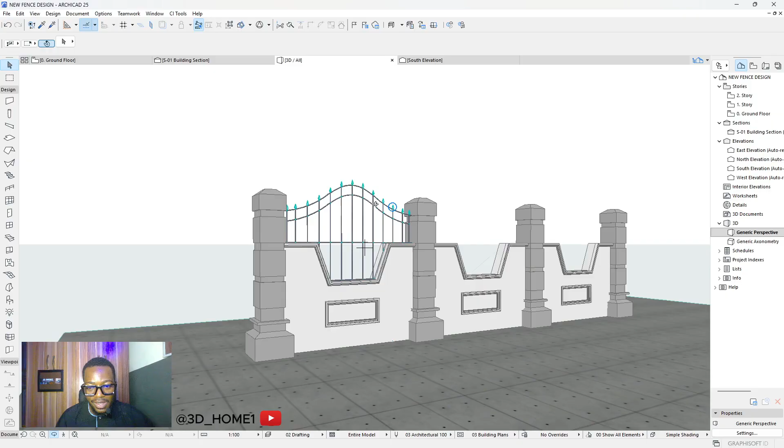Alright, let's get back to it. The first thing we'll be working on is the fence grill. You can see we have rough work already, okay? I did this for us to have an idea of what we're working on, so this is what we're going to model with more details. We are going to remove this, but just for you to have an idea of what we're about to do, we'll take this off and model something fresh.

So now, if you have a fence like this, or any design that you have and you want to model the grill, what you need to do is take the measurement of that thing. Because if you were to give a welder to fabricate this particular grill, he has to come and measure this. So for you to design it, you also have to measure it. Let's do the measurement together now.

So we'll be working with front elevation, which is the south. This is the south elevation. Let me take away this. This is the south elevation. So we need to take this measurement now.

The tool we're using for this is line. Under document, this is line tool, so click on line tool. Make sure it's under chained. Click on chain. Now I want us to pick the height from here. I want it to start from here.

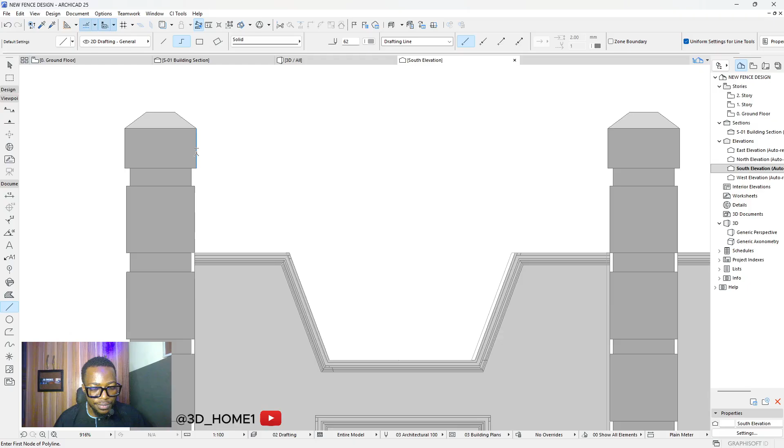Let's start from here, because these two lines are not aligned, so we'll start from here. We'll pick here to this point, and then take it all the way to this side. Once you get here, don't click on this line, just press shift and pick the same point. Now bring it down, come all the way to this point, click here, and take it down to this point.

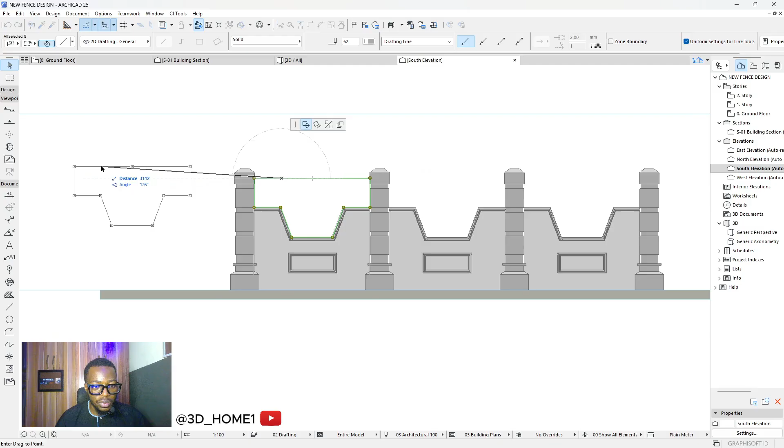What we are doing now is taking the measurement, we want to take the shape of that place. So now I click escape and click on this line. Let's take it outside to be outside. So we have the shape of this opening now. What we need to do now is like a form work, so everything we're going to model is going to be within and some touch ups. Once we're done here, we'll just take it inside and fix it for all these openings.

Alright, so after you've gotten the shape, the next thing is to go ahead with the design. Let's take off this one, but before then, suspend this group so that all the lines—remember we used chained line, that's why everything, without you suspending the group, is going to be chained. So for you to be able to click a single line, make sure you click on chain, make sure you click on suspend group.

Now you can click on single line. So let's do away with this line and this line, and then pick a fresh line. This time we're not going to pick chain, we'll pick single line, and then draw it all the way to this point. Okay, so now let's do the design.

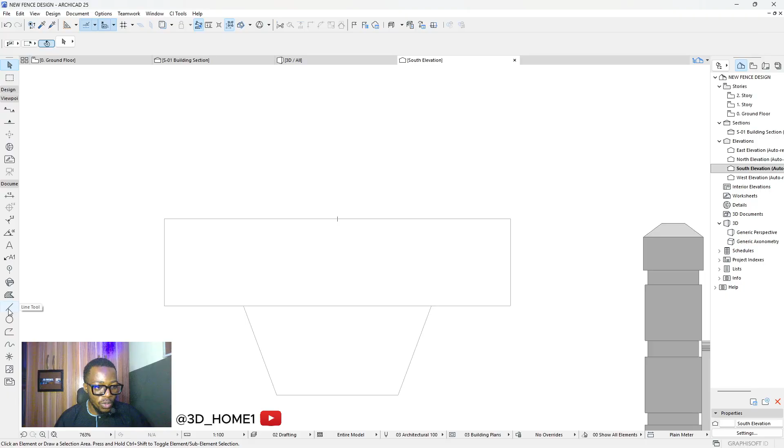You notice something like an arc on the other one, so let's do it now. We are going to pick another line from here. Now we'll determine the height that I want it to be. This is 430. Let's go with 450. It's still not bad, okay.

And now there's another thing we'll be using to get some points. After you've drawn the line, let's pick this hotspot tool. Click on hotspot tool, it's just for us to tick some lines, some spots—mark some spot. We have the spot now. Press escape. Now just select everything, shift and remove this one and this one, leaving only this one.

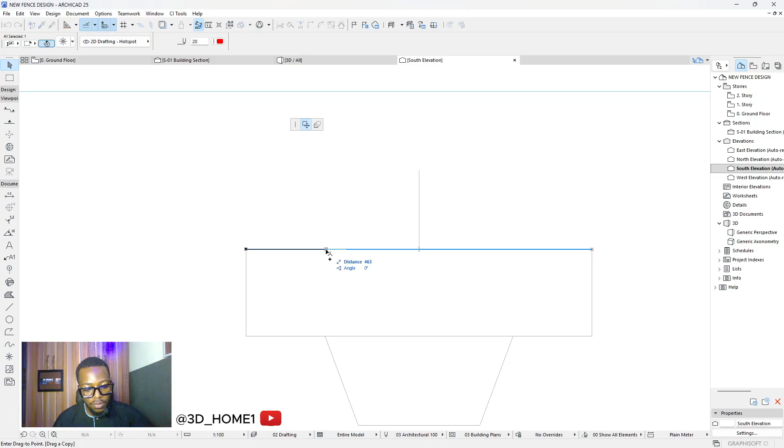Now we press control to have a copy of these dots. Let's bring it all the way to this point. This is okay, I think we should go with 452, 450. Open, enter. You see another line here.

So these lines are for guide, these points rather, they are like guide points. So pick the same thing, tap control to have a plus sign because we're making a copy of it. Now take it inside and still click on 450 and enter.

So we have these ones now. Now we're going to be taking these two lines up. This is very simple, okay? Just pay close attention. Now we'll select this line, press shift, and select this other line too.

Now let's take this one up to this point. I think this is one. Okay, let's go ahead with 150.

So this is 150. Now what we'll be doing is we want to curve a line like this, like this, like this, like this. That's the reason for this point, okay? If you don't have this point here, you will not be able to curve.

You might not know the exact point to click. So when reaching this other point, you might not know where to click. That's why we have this dot line, this hotspot line point. So if you take a line like this, you will know where to click, and then take it up to this point, you know where to click again.

So now the next tool we'll be using is the spline tool. This spline tool is just above. It depends on how your own setup is, but this one is just above the hotspot tool. So you click on the spline tool, bring it here.

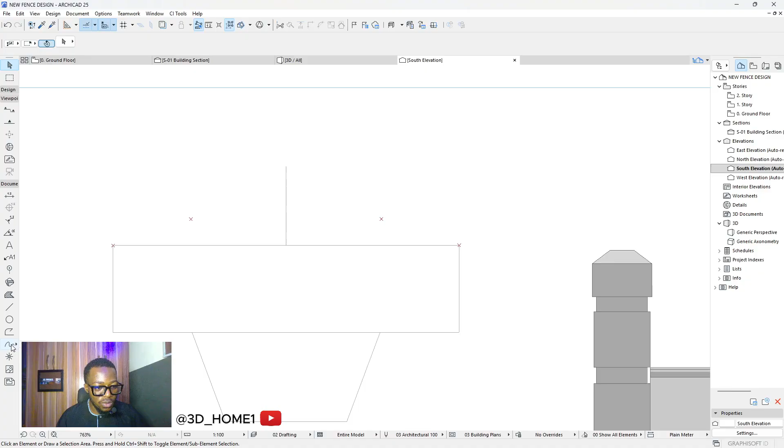This is the first point. Now you click on this point, so that as we take it up, it's curving. Now we click on this point, bring it back to this point. You click, then take it back to this point. Click, then right click and say OK.

Now you can see that we have that smooth curve. So now we don't need these inner lines anymore. You delete them. This is the only thing we need now.

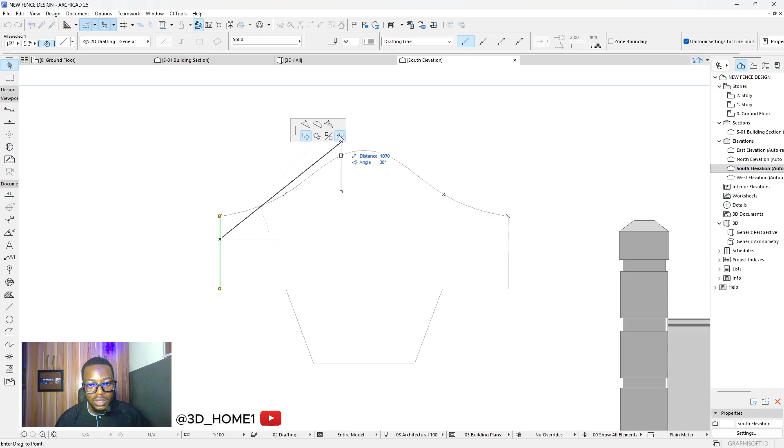So for us to have those rails, we need to copy these ones. But we're going to be dividing them. So you click on this one. Don't click again, just click and make sure it's flexible like this. Now click on this multiply and click on distribute.

Let's try 14 and see how the spacing is going to be. Then click and distribute. Okay, I think this is not bad. And then click. So once you click like this, just leave it like that. Don't click any other thing except for this adjust. Click on adjust and click on this top line. Everything will go up. You can see we have this now.

So now the next thing is, everything we're doing here now is just going to be like the iron work we're working on now. Like this is the design. We're already working on the design. So first of all, you have to use your lines to get those shapes and everything. So that is what we're doing now.

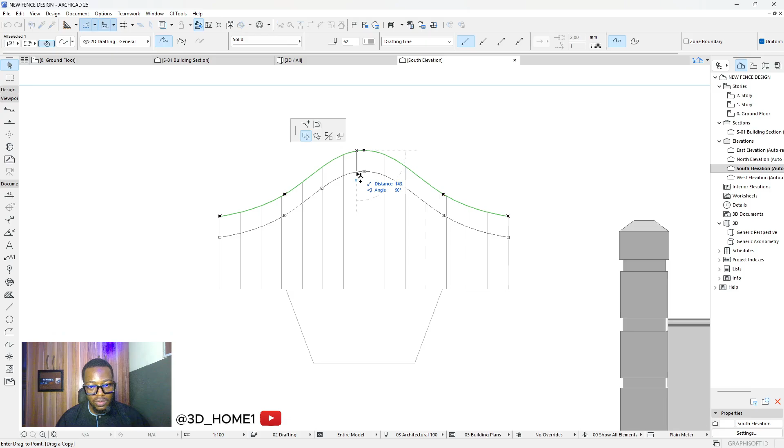So click on this line now, click on it again and tap Control to have a copy of it. So we're bringing this one down and this two. Everything you're doing now depends on how you want your design to look like. So let's click here, I will say okay.

And mind you, we need some irons that will socket here and here, and another iron that will socket here and here. So if we leave this one like this, it's going to flush all the way like this. So we just need to take like 50 offset inside, just say 50. Okay, then remove this line and delete this one.

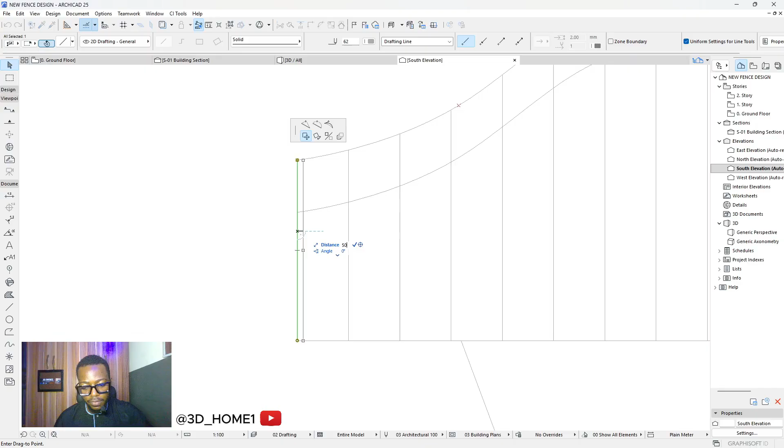Then let's take this one up a little, and then from here to here, say 50 again, 50, and then we delete this one and take this one up a little. But you notice that these ones are smaller while these ones are bigger, so we might just delete these inner ones.

Okay, and then pick this one, and still this time around let's say... okay, let's still say 14. Everything is going to still distribute equally from here to here. All right, so we forgot that, and click outside.

So don't worry, still click on it and make sure it's selected, and click on this adjust and click this top one. So everything is here intact. Now all the lines are distributed equally. That's all the rays distributed equally.

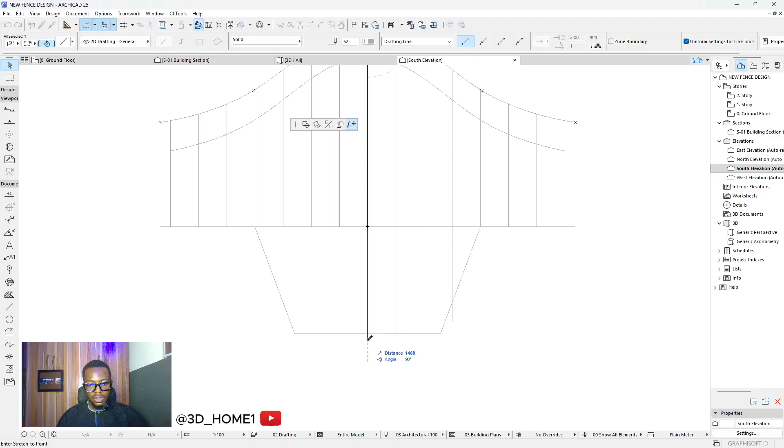But for this down part now, we just have to drag them down. Okay, we'll do that one after the other, one after the other. Just bring them down like this, like this, like this.

Okay, like this, and like this. So we'll click here, click this one, trim these ones. We'll just trim these ones and this one. All right, so I think we should add one little design up here too, to be nice. So we'll just take another design from here to here.

Press Control each time you're copying to have a copy of it. So we might just make this one 100. Okay, so this is our design now. I think we've done much already for now.

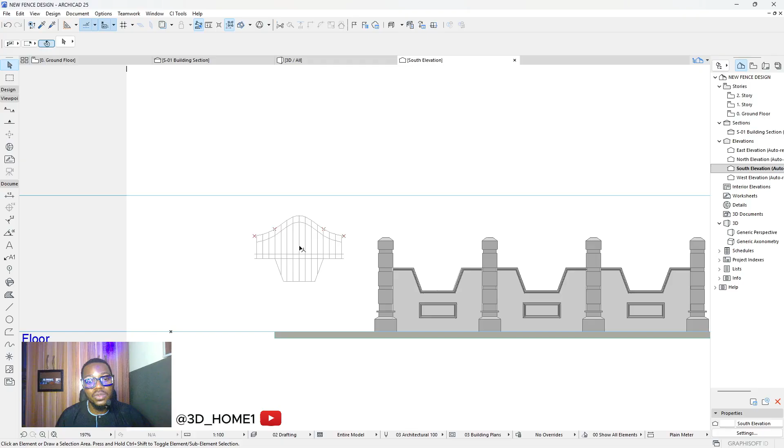Okay, let's just convert these things to lines. But everything you have here is just line, and mind you, we did these things on elevation. Take note of this, this is elevation. You cannot convert them to steel while you're on elevation.

So now we're going to copy everything like this, then Control C, which is copy. And now we click on ground floor, any floor of your choice. Let's delete this one, the previous ones I did. So you come to ground floor, this is where that fence is. Just come by the side and Control V, paste them by the side here. So this is what we have now.

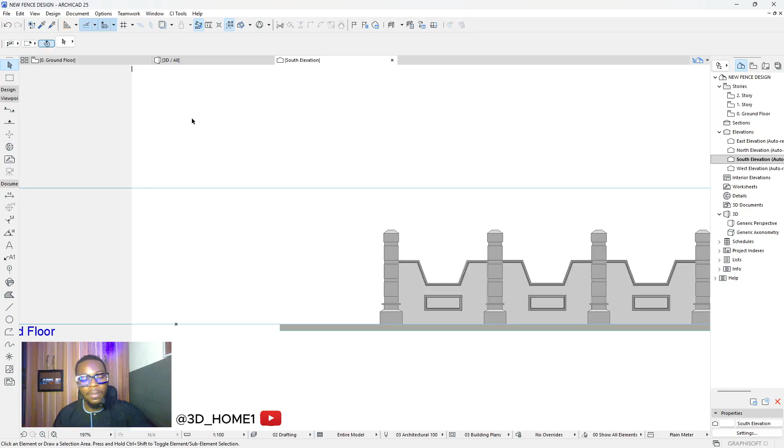So you're going to be working with this one on the ground floor. Forget about the one on the south elevation. In fact, let's just delete this one because we don't need it. Okay, make sure you're on floor plan. Take note, don't do this part now, don't try to convert it, because it's not going to work.

It's going to give you some kind of issues. So make sure you're on ground floor before you do that. All right, so let's proceed. Since we are here now, what we need to do is go back to our design and then go to beam, not column, beam.

Click on beam. Once you click on beam, go to the settings. Once you're on settings, come to segment. Under segment, this is where you determine which of them you want to use. You might decide to use this rectangle, or you might decide to use circular, any one of your choice.

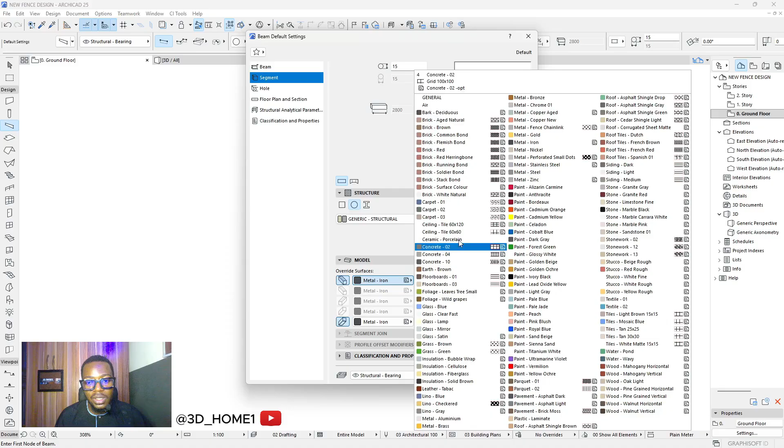So let's use the circle, let's just use the circle and see. You click on this circle. This is where you change. Click on these two, change them, and then select the color of your choice. For this spacing, sorry, the diameter, 15. Will 15 be okay? Let's try 20, let's try 20 and see if it's going to be too big. So click on 20, we type 20, and then click OK.

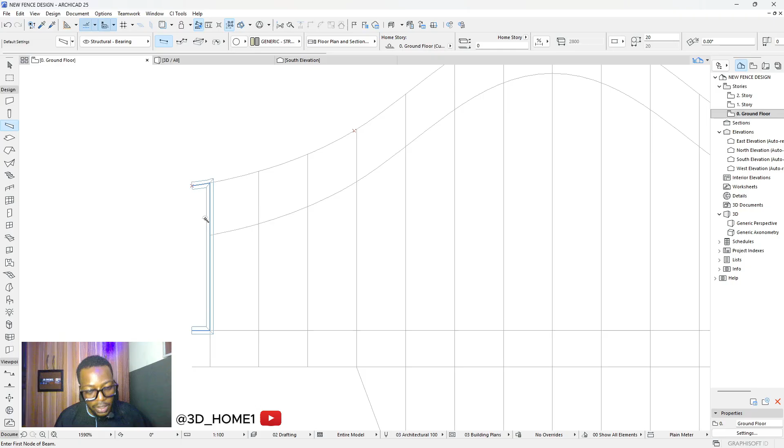Once you click OK, this part now is very simple actually. Once you come here, you can test the thickness by drawing. If you're okay with the thickness, this is 20mm. If you're okay with the thickness, then you can go ahead and hold down your spacebar button and start clicking on them. You click on this one, it will show. You click on this line, then click on this one, then click on this down one, and click on this one, like this.

So that's why I said the lines are actually your guide. First of all, get all the shapes with your lines. Once you get the shapes with your line, then you can proceed with all. The thickness will not be a problem.

We need to create some little arrows above this, some little arrows above this. I think that would be nice. So let's go back to our ground floor. Okay, so now since we are on our ground floor like this, can we extend this?

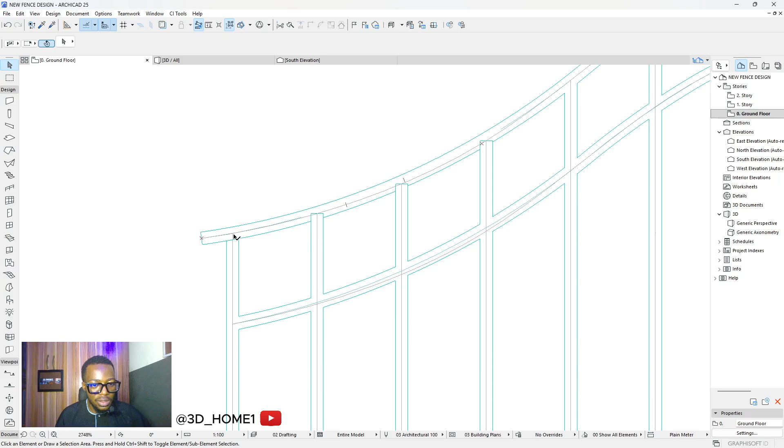Okay, since we are on our ground floor, let's add a little thing above this. We'll click on beam again, click on this middle part and type in let's say 50.

This one too. Or instead of repeating everything, let's just copy this. Tap, move, then control, bring this here. Just control. Make sure your plus sign is showing before you copy, otherwise it's not going to show. Like you see, we made a mistake here.

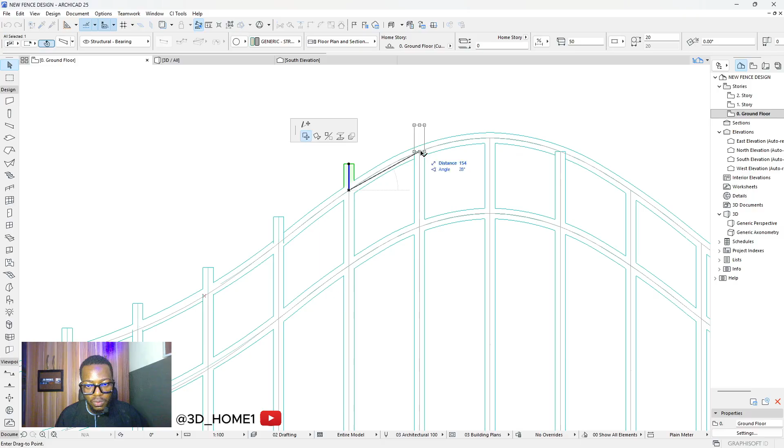Okay, so now click on this, copy, and then tap control, we're taking this up. Plus sign should show before it's going to work. There's no plus sign. Okay, there's plus sign now. Like this, and like this. Plus sign must show before it works. Okay, plus sign now. Do that by tapping your shift, then it will show.

You see the beauty is coming out now. If you check our 3D, you can see the difference now. It's coming out. So now we need to add arrows on this top, arrows on this top. So that's the next thing we're going to do now. How do we add those arrows?

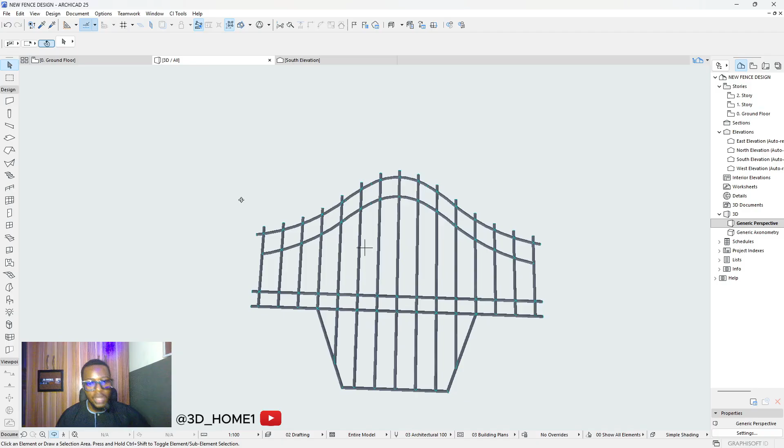This is another stage now that I need you to pay attention, okay? Because constructing that arrow is very simple, but you need to pay attention, otherwise you might miss this simple step, okay?

So now we're going to click on, under this document, you're going to select this fill tool, okay? Click on fill tool, then take this part from here to this part like this, okay? This is what we have, right? So now from here, move this point, make sure it's on this move node, to this point, and then we are drawing those arrows, okay?

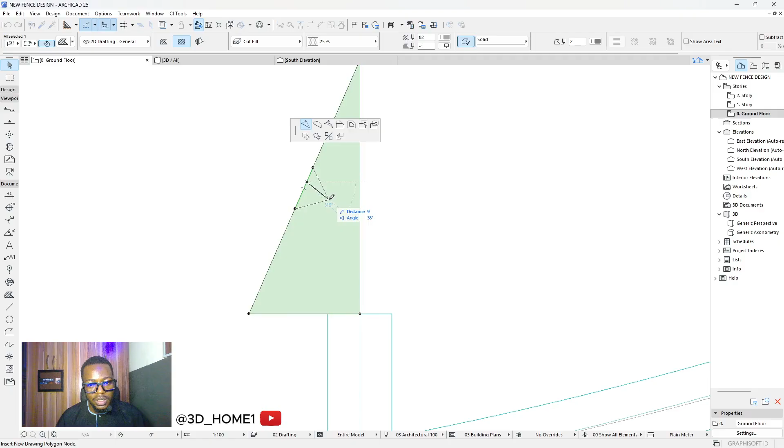So now we'll click on this middle and select this one, click here, we are adding a node, then now we'll move this one inside like this. Then for this one, we're adding another one here. So we'll move this one back to this point.

I think we might just add one again. So we'll keep this one here. Okay, so now for this one, we'll just click here and then click again. So we'll click on any of the nodes rather, and then click on this fillet slash chamfer. Leave it on this fillet and change this radius to 5 and say okay.

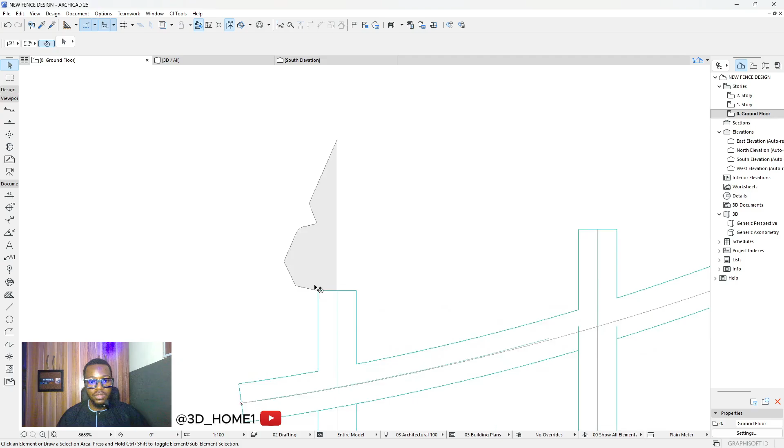So everything looks smooth now. No, not all, not all. So I think we just have to pick the line. Nope, there's something we need to do. Click on this, let's check, make it 5.

Wow. This point, this point, this point, this point. Okay. Let's try something.

Apply to all corners. Okay, let's select this, apply to all corners, and then now leave it like this. I'll make sure this one is 5 and then okay. Boom. So this is it.

Alright, but for this up one, let me do that again. Once you click on any of the nodes, okay, click on this fillet slash chamfer. Make sure this apply to all corners is checked. Then make this radius 5 and click it to affect everything.

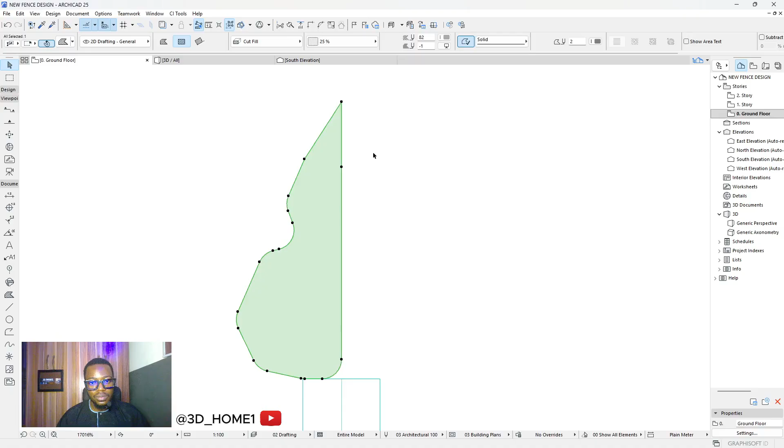So now we don't need this one to have it. All we need to do now is just click here and then drag this one straight like this. You can see a little bend here, it's still okay, let's leave it like that. But if you want it, let's just keep it sharp. Let's keep it sharp.

Yep, okay. So for this down part, I just change it to this one, then bring it straight all the way here like this. So now we're going to click on this. We're going to leave it like this. Then we'll click on the first on this drawing of this arrow.

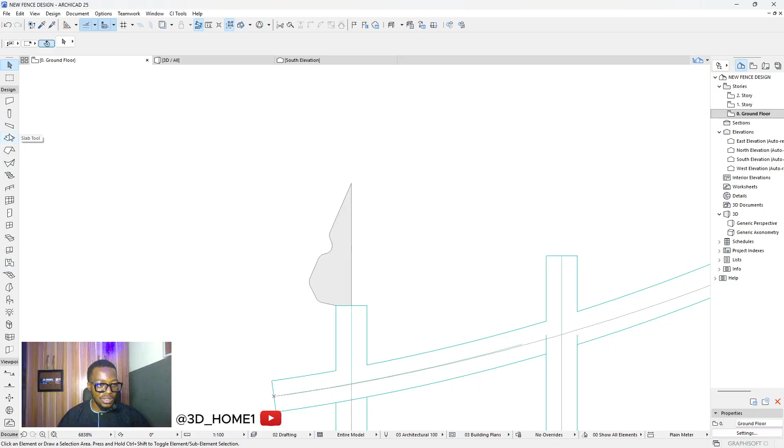You first of all need to use your chamfer and your fill tool to create this shape, and then use chamfer to smooth the edges. That's one. Then secondly, now you need to go back to design, click on slab, hold down space bar.

But before then, make settings on your slab. Let's make this maybe 50, or let's say 30, it's okay, thickness, so it's 30. And then for the color, let's make use of gold. Let's say gold, we cannot find gold, might just use yellow. Okay, let's say this yellow, and then you say okay.

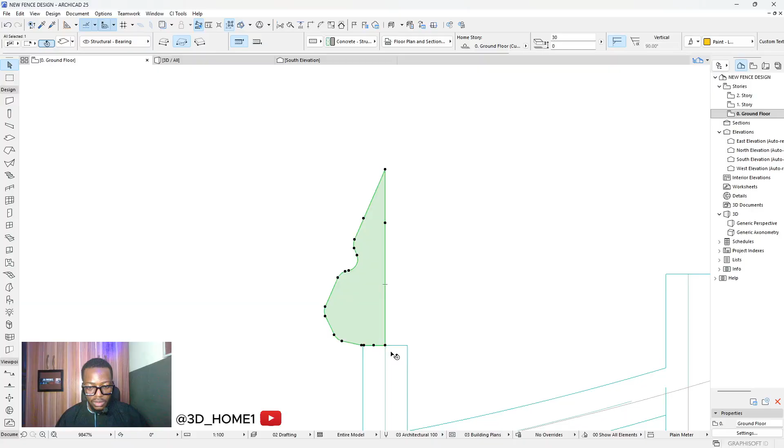Okay, so now press spacebar and click inside. Everything is inside now. So this is slab now you're clicking on. So if you click on this slab now, hold this node, we are going to mirror this. Okay, we're going to mirror this.

Tap control to have a copy of it. So this is mirror now. This is the slab, but there's still fill tool there. So we might just shift this one a little to this part, then erase this fill tool, and then bring this one back to its position.

Back to its position. So now you can see that an arrow is showing, right? It's not yet done. Let me show you our 3D now. This is not how we model.

Yeah, we are professionals. We are the professionals in this channel, all of us.

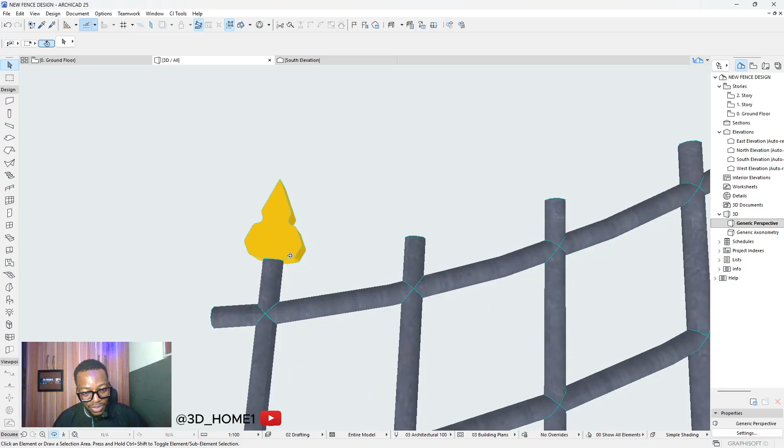We're actually going to change something. I think we should reduce the width, or we should leave it like this. Let's reduce the width a little.

It's looking to be, because when we start applying them, the spacing here is going to be small, and this is going to look very big. So let's just go back and reduce this one.

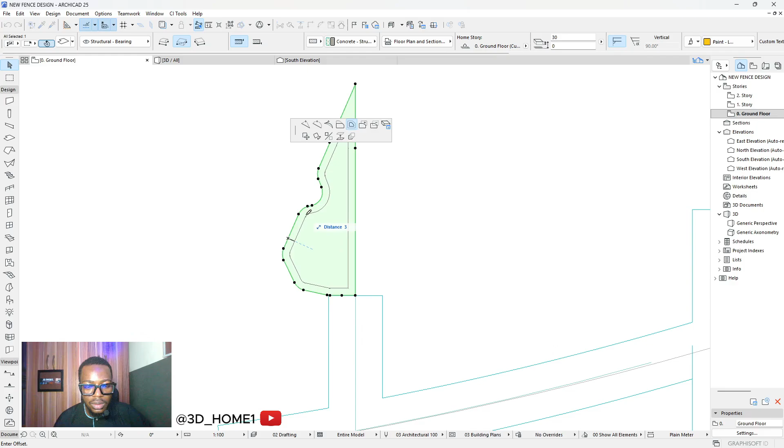So we might just do it this way, like this, and select this chamfer all, and this. We'll take this one, move it to this point, and for this one, shift this node to this point. Now let's rotate this.

Let's mirror it again. From here, tap Control to have it. I think it looks better now.

Let's check the 3D. It looks almost the same. But the thickness is much.

So what we need to do now is reduce the thickness. Click on this other one too. Reduce it from, this is 30 and it's looking this big. Let's make it 20 and see. I think we'll leave it at 20, 20, 20.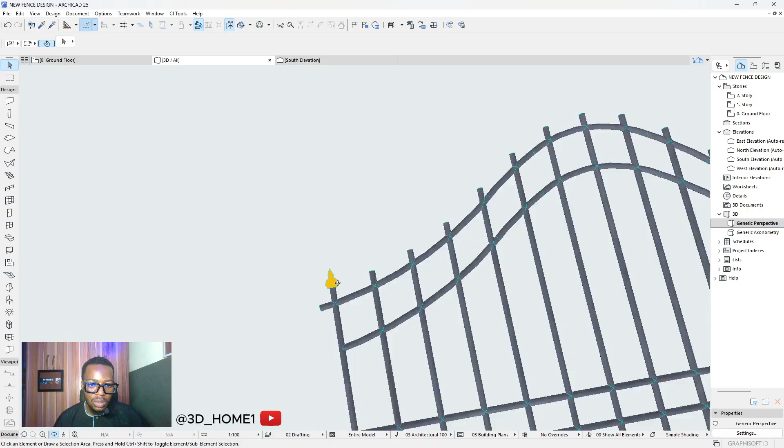I actually think, I'm thinking something. We should slant this a bit. Okay, let's leave it like this.

Now, this arrow is one side. It has to be showing, it has to look like a star when you're looking at it from the top. So what we need to do now is to change that look and make it look like the star.

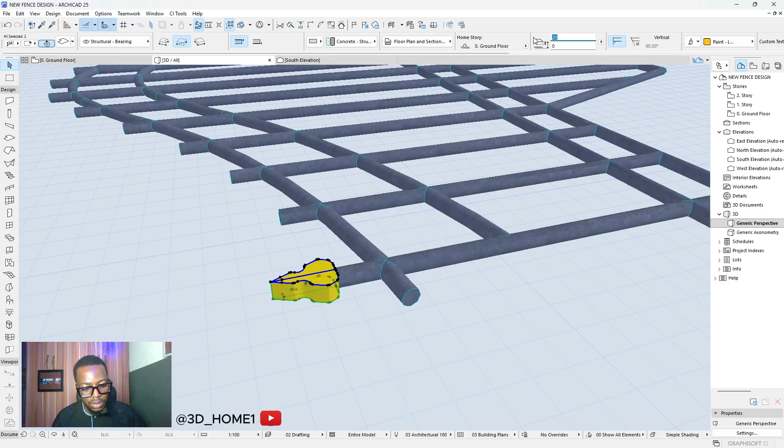If we convert this, if we reduce this thickness to 10, let's see how it's going to look like. Convert this to 10. It's not bad, because we're going to change this other view too. So what we need to do right now is

We're going to click on this tool. Once we click on this tool, we're going to right click and then convert this to morph tool. Yes, convert to morph tool.

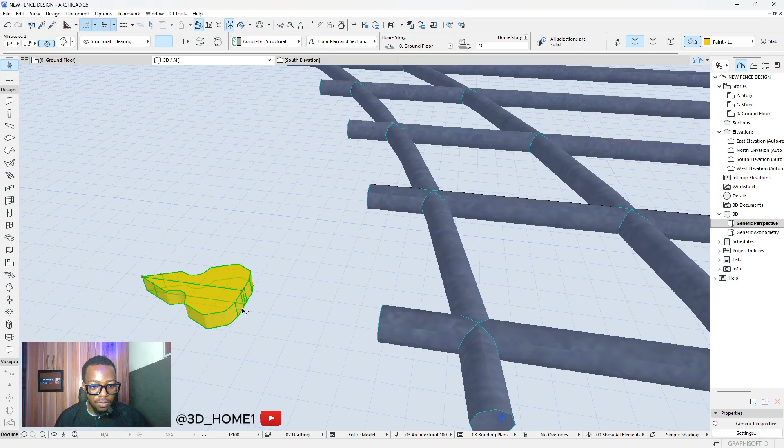And then now we're going to first of all shift it from here to this side. We're going to stand this. Once we stand this, then we'll do the adjustment. But sometimes if you want to rotate it and stand it, it might look a bit difficult to stand.

Okay, we've gotten something. Thank God. So we'll just use this one and stand it like this, straight. But in some cases where it's not standing, I think we might just use that formula again. Don't worry, when we want to use this one, we might use that formula.

Well, this is another one. This one actually stands. So now you're seeing the top now. So what we're going to do now is we select everything. Select one part and click on rotate. Pick the middle point, bring it this way.

Tap Control to have a copy of it. That plus sign should show, and then rotate it to this side. We are going to have two of this together. So now select everything, right click again and convert

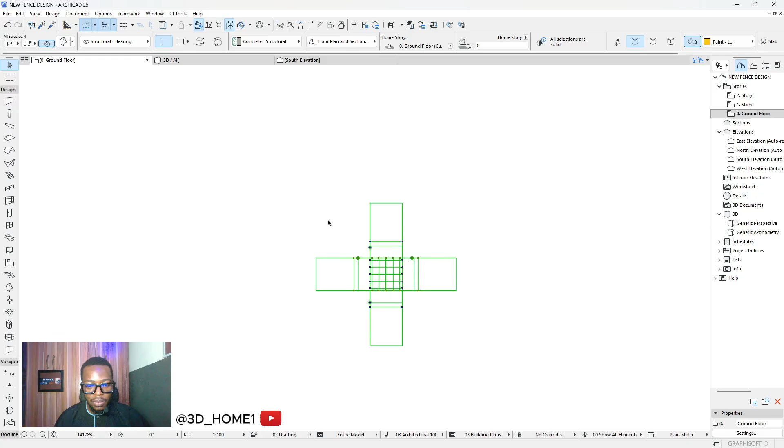to morph. Okay, so let's see how it's looking like on our 3D. You see how it's looking like now. The star is showing, but there's a way it looks.

Okay, so that's the adjustment we're going to do now. Everything should point to one direction. How do we do that now?

The simple thing we're going to do is go back to our floor plan and pick, we're going to go to this document, select view this section, bring it here, open it to this side. This is looking big. We just take it back a little so you can see your work. So now click on this, right click and open view. So this is it now.

Now what are we going to do? We are going to reduce this thing.

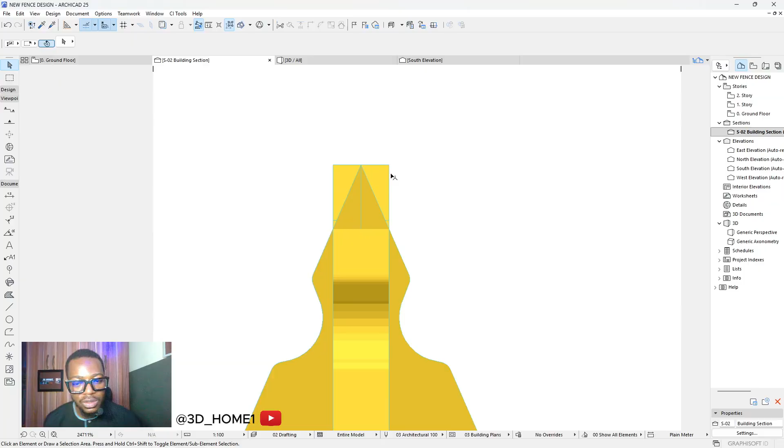So you click on this one, click on this dot and bring it to this middle point. Click on it, this other part again, bring it to this middle point. Click on this one, bring it to this middle point. Click on this one again, bring it to this middle point. So now it's remaining this one. Okay, it's remaining this one.

So now let's check our 3D. There's a bit of difference. We might not see it now, but let's take this one up and rotate this one to face down. Rotate this to face down and then move it to this part,

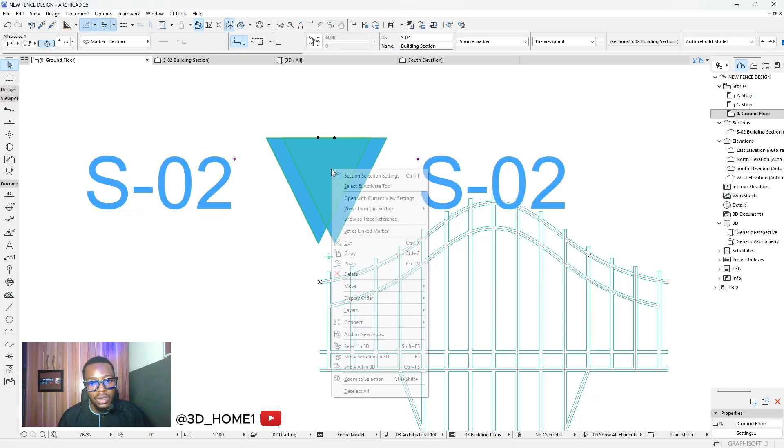and right click and say open view. Okay, now we're going to click on this one, take this point to the middle point, click this one, take this point to the middle point, click this one, take this point to the middle point, click this one too and take this point to the middle point. Everything now is together. Okay, check our 3D, discover that they have one point.

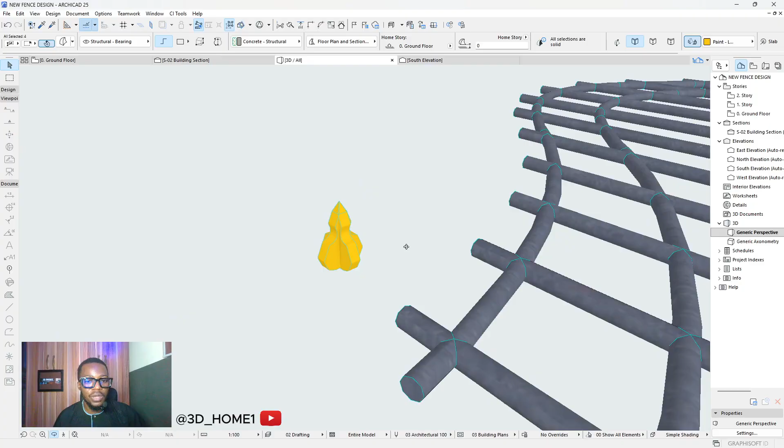They have one point. They're pointing to one direction. All right, pointing to one direction. So this is our arrow now. Okay, this is our arrow.

So now we need to return this one back to look down, or we raise this one and apply this one, but we still need to leave it on the ground, because on the floor we need to do some little design inside here. So that means we just have to take this one back to its previous position.

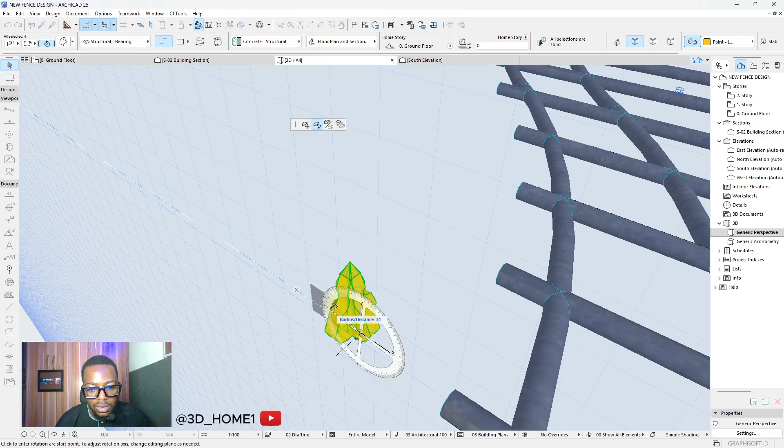So select everything and Control G. Now remove this suspend group. We click on this now, click again, let's look for that rotate and see if we can rotate this back. Thank God. So we take this straight from up, let's see, from up back to this point, this down point.

All right, so now mind you, you can design your arrow however you want it. Okay, with any other design you have in mind, but I'm just trying to give us the steps. Okay, with these steps you can design anything you want to design. So now we have this here.

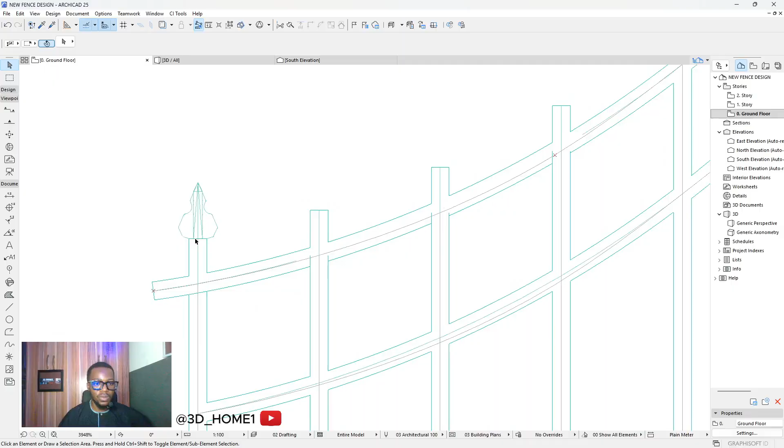All right, we have this arrow here, and I might want us to rotate this a little, like to rotate this a little. Might just be like this and decide to turn this a little. Hope this is straight. Hope this is straight. This is not straight though.

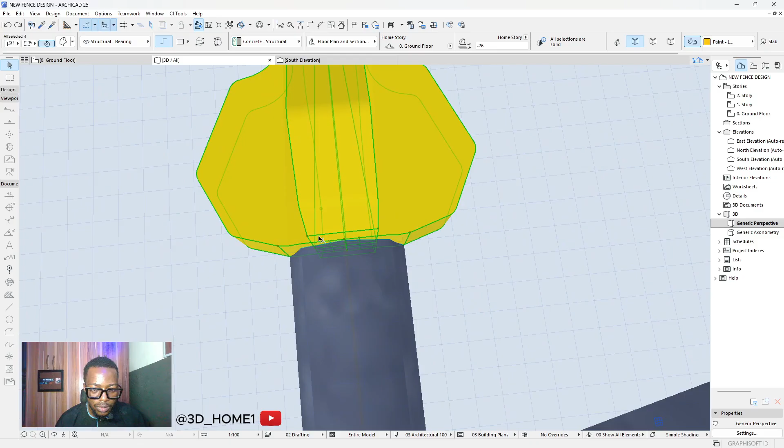Let's see if we can rotate from here. This is not looking fine. Let's shift it to the front a little bit. Then we'll click here and okay. You know what? Let's leave it like this for now.

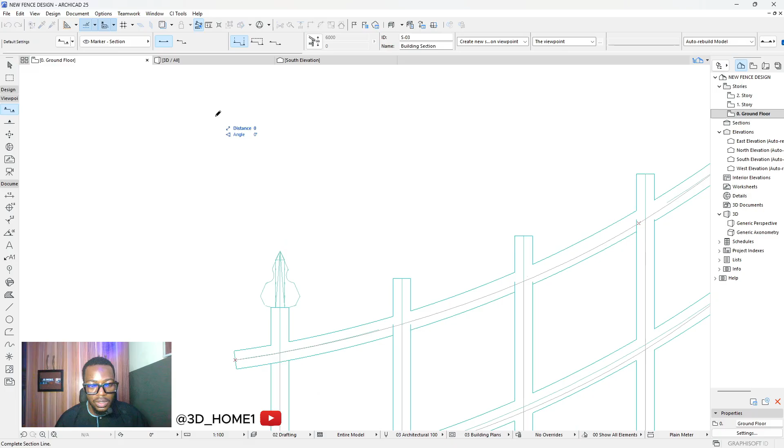If we stand everything, then we can rotate them. Can rotate them when we stand them from the plan view. Or you can still decide to use another method. We have different methods of doing things actually. You can decide to cut the section view from here,

and then let's try this method. You click on open, you're going to still see it. So this is it. You see that if it's on the plan. Then now,

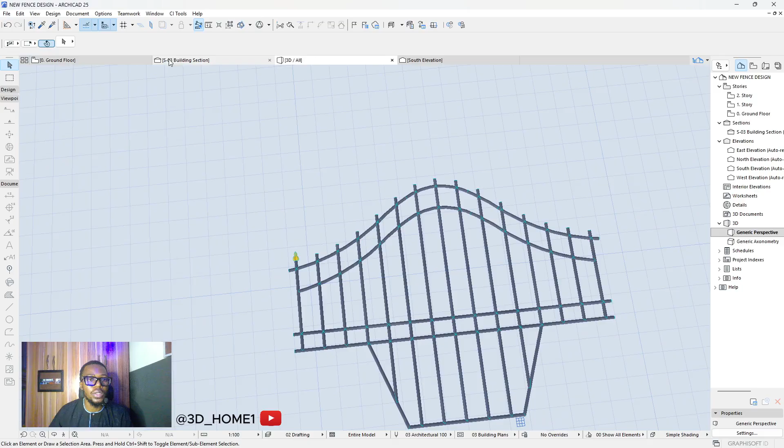alright, so let's rotate this a little bit, just a little bit. Okay, so you click here, select this rotate, stand at the middle point and rotate this a little. Okay, so let's see how this one looks like. All right, so now from here now

we can shift the remaining things. Let's delete this section line. So now we can shift. I think we should draw a line from this middle point downward. So now we can select both the lines. Let's do it this way, from here to here. So click here, click here.

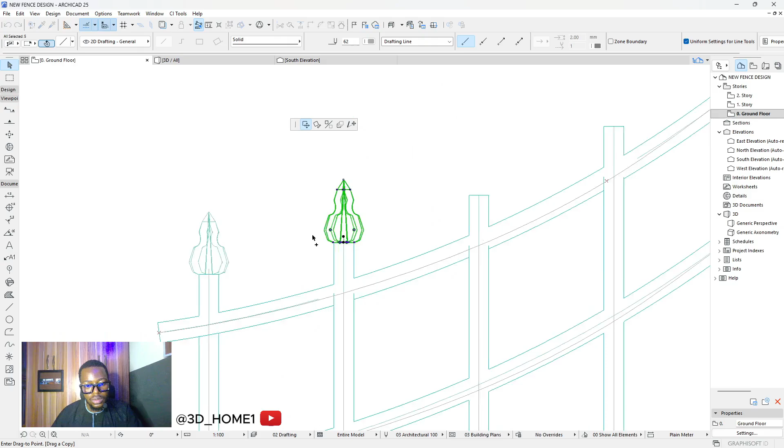So now I can select this line. Okay, then under move, we'll copy them to this point and make sure you click on control to make a copy of them. Okay, if I'm moving this thing to this side, I must click on control so that the other one will still be intact. Otherwise, as we keep moving, the previous one will be going off, will be moving out. So your plus sign should always be activated by pressing control.

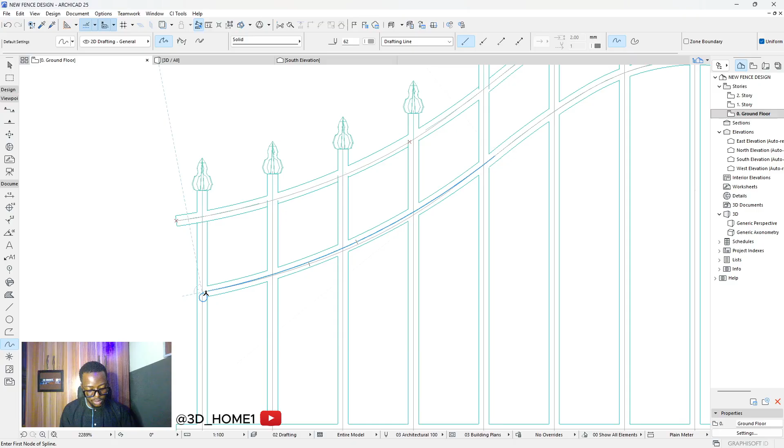Sorry, my mic went off. I'm just discovering that it has been going off and I didn't notice, so please bear with me. We'll manage this mic for now.

What I was trying to say is you copy all of them to this single rail, and then everything is coming out. But before then, we still need to draw some simple designs inside these pieces, and that's the final step.

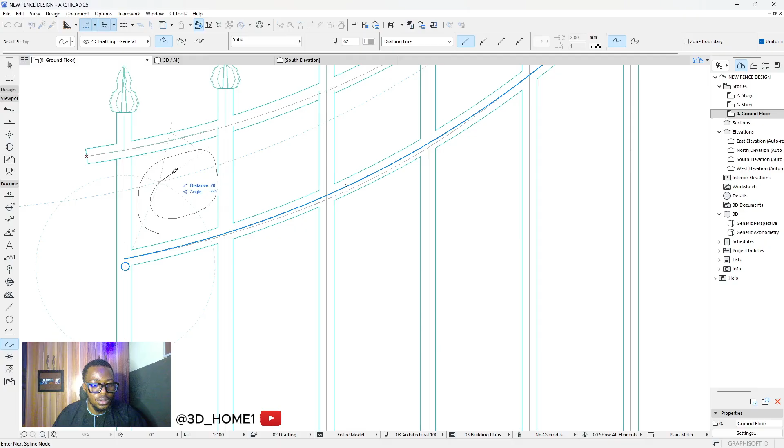I'll be using the spline tool to do that. So now we'll click on this one, and we just do something like this. I don't know if it's okay. You know what, let's just do something simple.

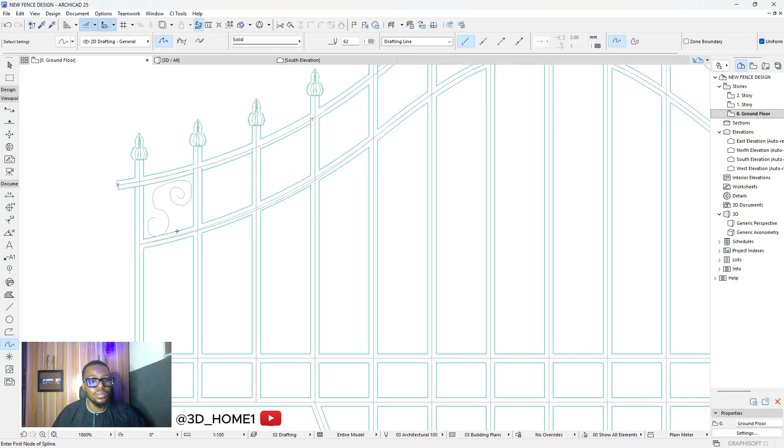Let's do something simple. Okay, for this one, I just do something like this. I just want to do something simple at the same time.

When you're working on any other design now, just take this as a guide. Yes, use this as a guide.

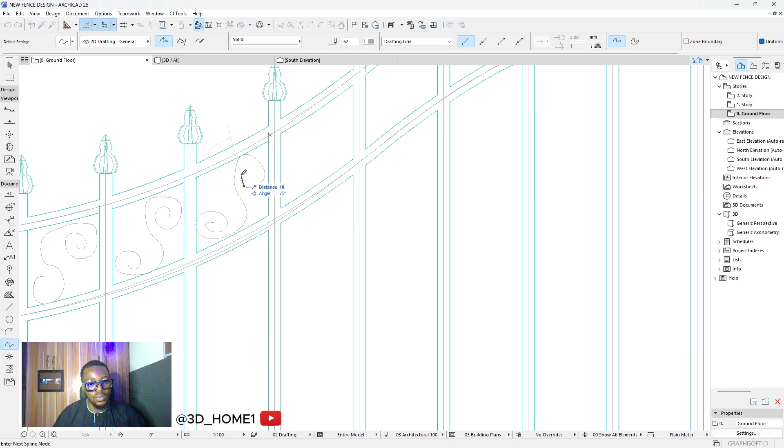Okay, this one should continue to this side like this. It's looking funny, but at the same time it's coming out. I think we'll just do everything and mirror it.

All you need to do is just follow a particular shape and keep clicking. There's nothing too hard about that. As you're clicking, it will be taking the shape.

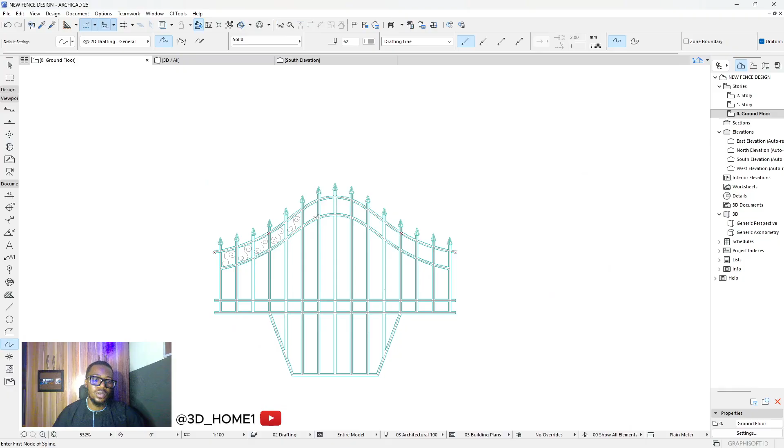This is not good. Okay, same thing here, like this. Okay, so we're almost done. Then we'll take this one. This will be the last one. Then we might just mirror them.

Okay, this one will continue. It's not giving us the vibe we want.

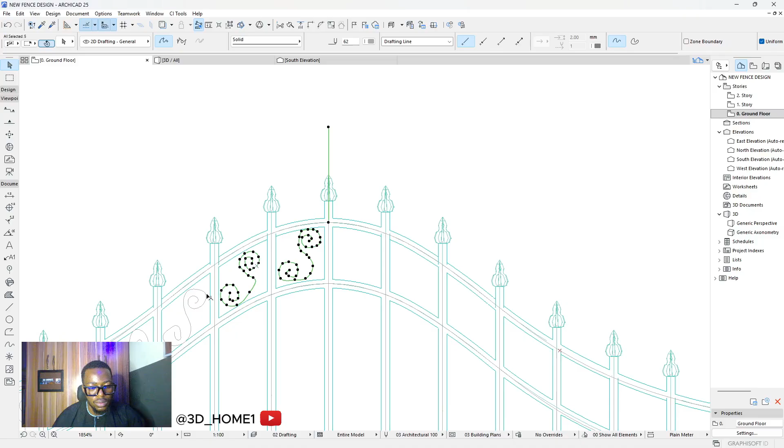Okay, let's mirror this to this side. But before then, let's grab a line first too, from here to here. Then select everything at once, to here, to here, to here, to here, to here. And then we'll mirror this from this point to this point.

Tap Control to have the same, so we have the same thing this way. Okay, so now what we're doing is we're still going to use the same beam tool, just how we used it for this one, to get all these things.

So you click on your same beam tool, go inside the settings, still leave it on this circular setting. You can decide to use any of them, so we'll just use the circular. But this time around we'll change it from 20 to, let's say 5. Let's try 5.

And then now click on spacebar and click on them. Click on them.

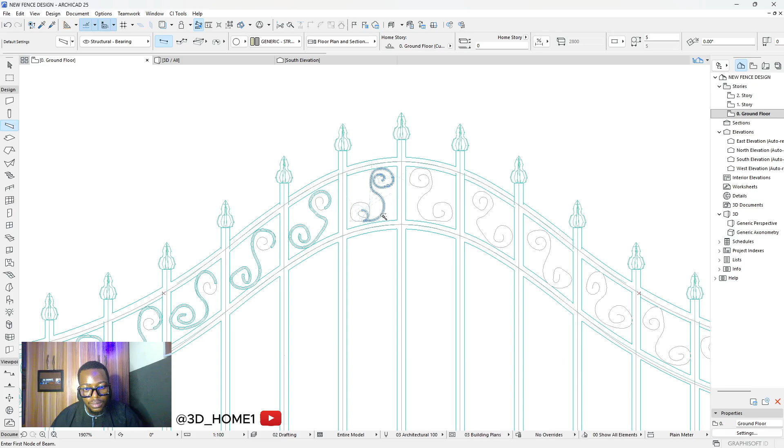What is wrong with this one? Something is not giving here. Let's come to this one and see the same thing. Every other one is okay, except we need to amend something there. Let's amend something.

These ones that have additions, we need to fill in those addition points.

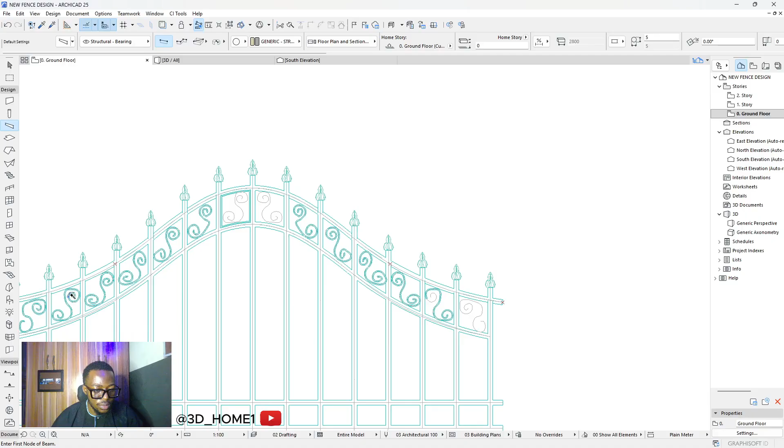Okay, so it's remaining this one, which I've refused to join from the down part, so we just delete it and redraw this point. So on that document, we'll still pick this line too. What's happening here? We don't need this one. So pick the spline tool and do the drawing again.

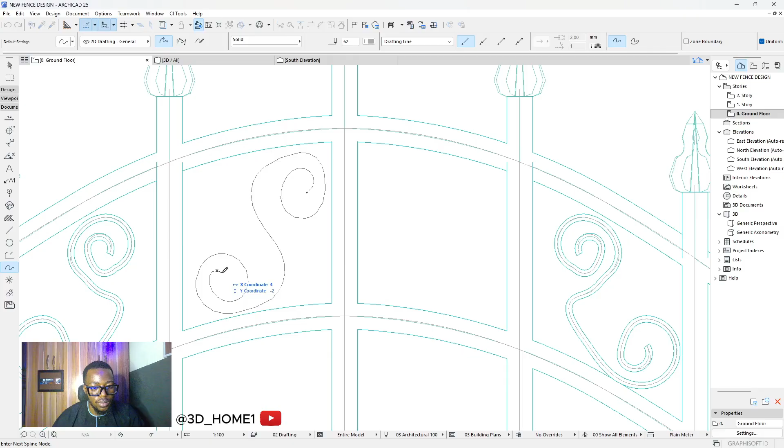This one is even going to look better. Yeah, okay. So click on this line and mirror it from here. You tap Control to have a copy of it.

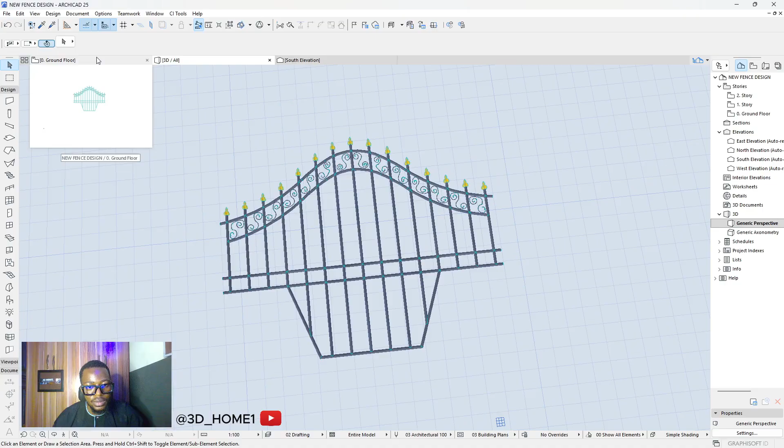Okay, so same thing, our beam with the settings we've done. We'll click on this and click on this too. So now you can see we have this design. If you check our 3D now, this is the design we've done so far, and we might want to do one little adjustment.

Okay, let's add a bit of yellow. So we'll click on this, select this, then we'll change the size to, let's say, 40. Okay, if I draw it here, it's going to show, that's the aim. Okay, so for the color, we're going to change it to the same yellow, which is this paint.

Then we're going to draw it here, from here to here. Our 40 looks too big, let's change it to 30, and we're going to draw it from here to here.

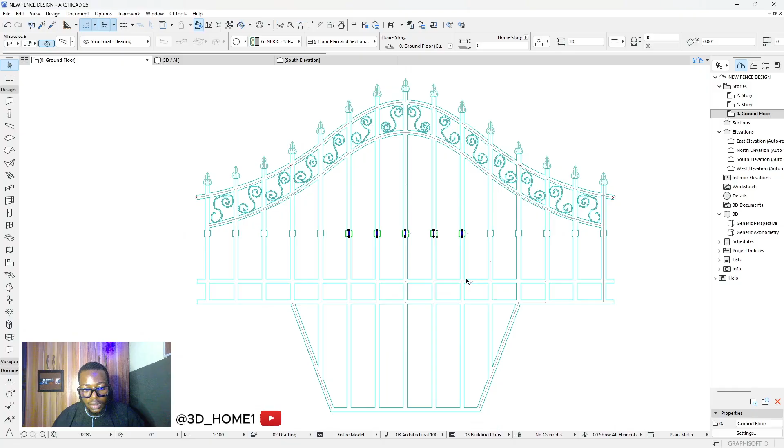Then we'll copy this. We'll select 14, from here to this point, that was the division we did back then. So it's still okay, and we might want to pick this and this and this and this and this. Yep, copy this one down to this point.

Alright, so if you check our 3D now, this is what we have done. This came out very, very well. So now what we're doing is we're going to highlight everything.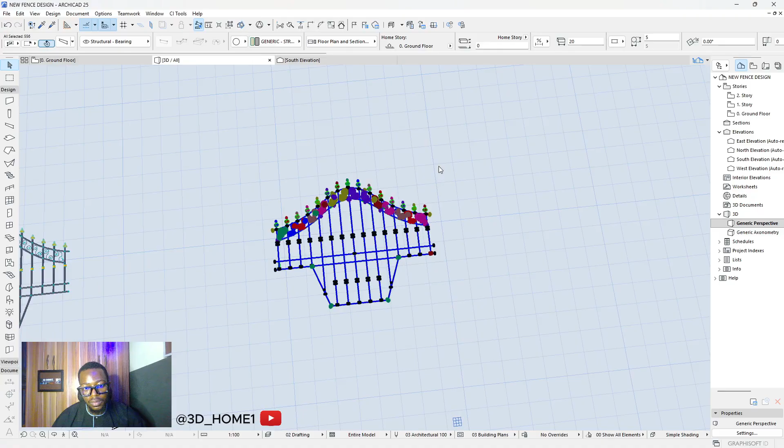Let's make a copy of it in case there's any mistake, so we can easily fall back to this one. We'll select everything, right click and convert to morph, then continue anyways. Now we'll right click again and unify, boom.

I like the way the thing came out, the way the fence grill came out. It's looking good, came out well. So now what I'm going to do is click on this one. Okay, that was a bit heavy now.

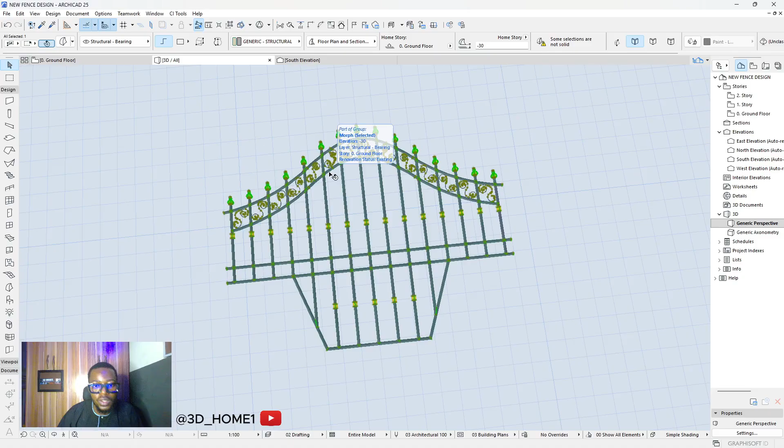I'm going to click on this. Earlier I said while trying to rotate these angles, sorry, the stars, those arrows, there's another means we can use to rotate it and make it stand. So I'll select everything again, then right click and convert to morph.

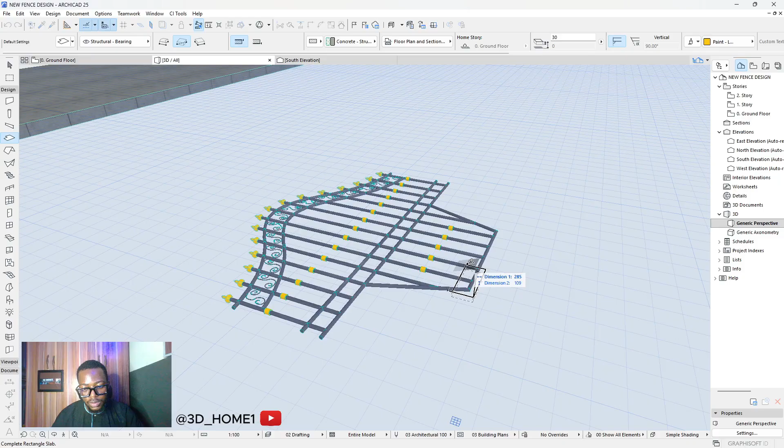Control G, I'll group everything. Now click on this one, click on this morph, I'll rotate. Let's see if we can find a way to. If it's not showing, just uncheck the group, like hide, just hide the group.

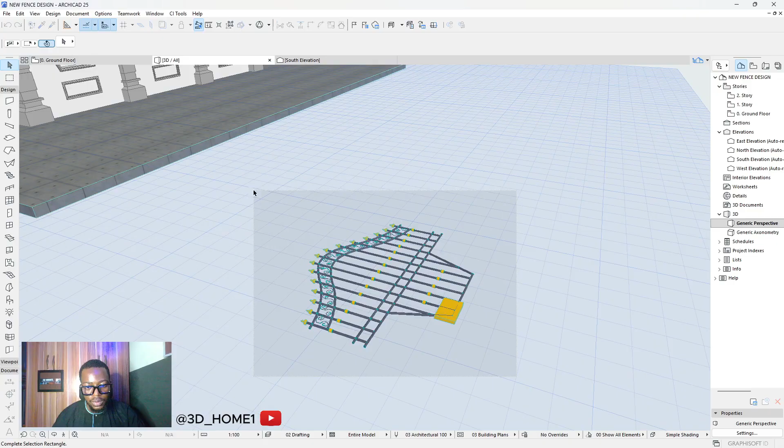Let's select everything I'm seeing, then we'll click on group. Something is not giving us what we want. Okay, what we'll do right now is use another method to raise this.

We'll select everything, leave it as grouped as it is. Then we'll click on west elevation, which is this. West elevation, you should be able to see this gap. So click on this now, click by the side, click on rotate.

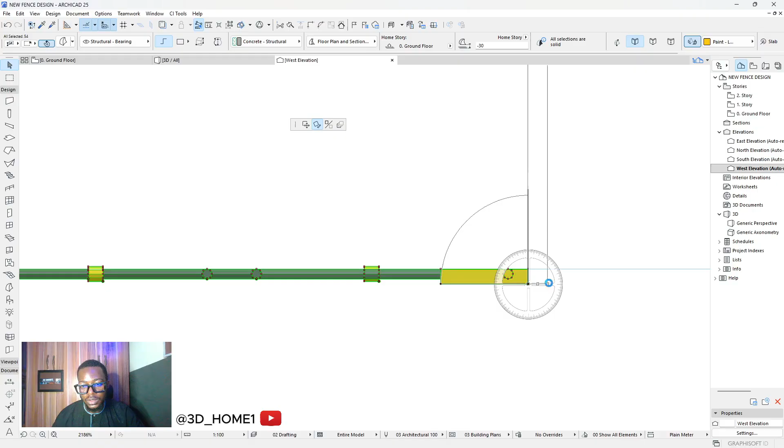So we'll rotate this from here to here, we'll just turn this one. This is another simple way of doing it. Okay, so now we don't need this slab anymore. Just come to suspend the group and then delete this slab because we don't need it anymore.

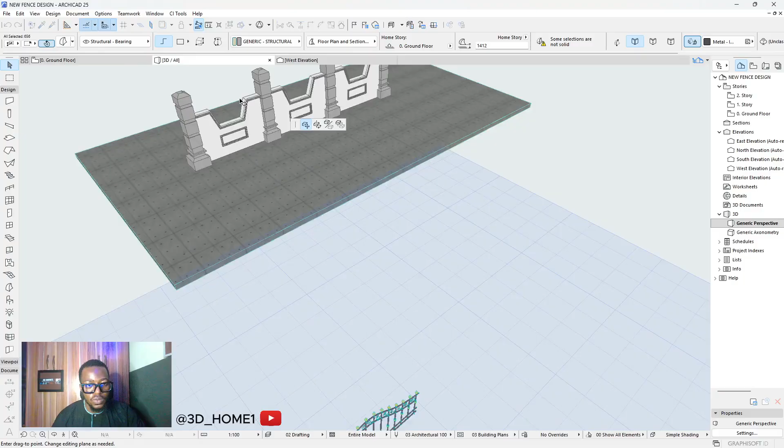Now let's check our 3D. Everything is standing now. So now what we're doing, we'll leave it back to the group, and we're going to take this point, any of the points at all. Just hold any of the points, remove it from rotate, click on this move, and let's move it now to this place.

Now you can see that we've created this beautiful rail, and if you want to see, these ones are intact, these ones are inside, these ones too are inside. So now all we need to do is copy them. Just go to your south elevation and copy.

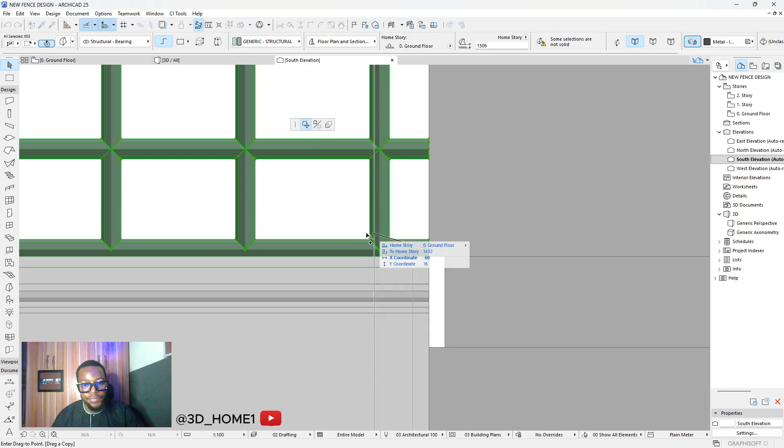Okay, so click on this, we'll click on this point. Ctrl A, just move it to this other side. Click. Did I press Ctrl? Yeah, I did. So I'll click on this one, Ctrl, and click this part. Yep, and I'll click here.

Thank God the mic didn't go out this time. I'm sorry for the inconvenience, guys.

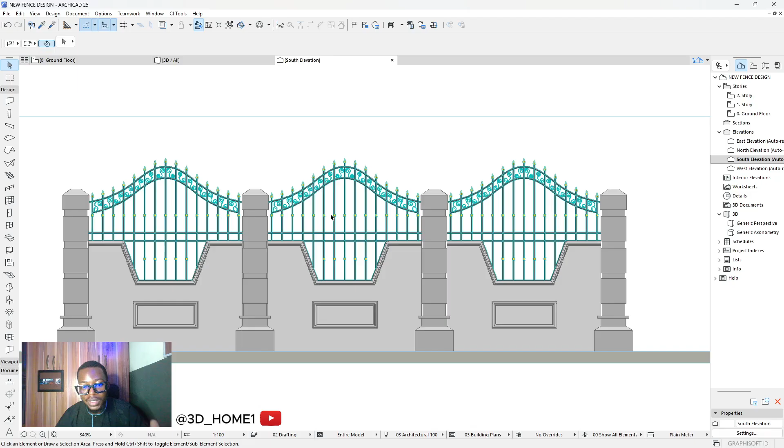So now we've done this successfully. The reason for this fence design is that sometimes you might want to model a particular fence, but there are some designs you can't find when you check online, so you just have to model them yourself. Some clients, once they give you a particular design, you have to bring that exact design, so I had to find a way to model this one. If you model this, you can save it as components, and anytime you can easily use it again.